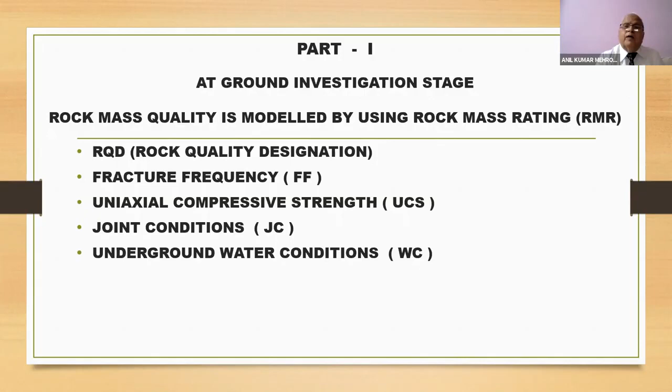As you all know, geotechnical engineering by its nature demands tools for coping with large uncertainties and variations in material properties. Identifying conditions prevailing in rock mass and soil, and if satisfied, could convert geostatistics into a real design aid for geotechnical engineers. Geostatistics deals with regionalized variables. Regionalized variables are those which have a spatial correlation with distance. The sample values are correlated with distance. This is a very important aspect, and the only difference between conventional statistics and geostatistics.

Rock mass characteristics are also spatially correlated. Now, this is very important. Rock mass characteristics are spatially correlated, and hence they are also regionalized variables. So they cover the first condition of applying geostatistics. They have some relationship between location and data.

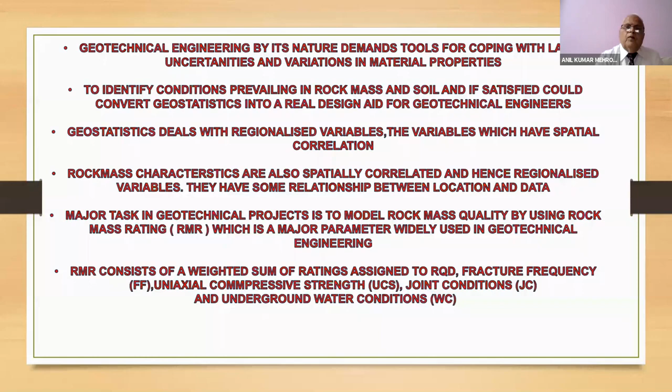A major task in a geotechnical project is to model rock mass quality using rock mass rating, RMR, a major parameter widely used in geotechnical engineering. RMR consists of a weighted sum of ratings assigned to RQD, fracture frequency, uniaxial compressive strength, joint conditions, and underground water conditions. Rock mass properties are summarized using rock mass classification. The most commonly used scheme is rock mass rating.

Intact rock is defined as the rock material found between discontinuities. The rock mass comprises the total volume of the rock, including intact rock and discontinuities, and its mechanical behavior can be significantly different. So intact rock properties are density, permeability, and rheological behavior. Rheology is the study of the flow of soft solids. Then fourth is UCS, uniaxial compressive strength.

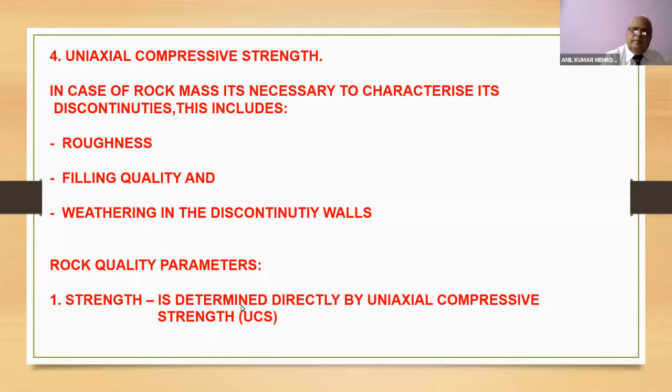In case of rock mass, it's necessary to characterize its discontinuities. This includes roughness, filling quality, and weathering in the discontinuity walls. Now, rock quality parameters. First, strength is determined directly by uniaxial compressive strength, UCS. Number two is number of joints per cubic meter, JV, and RQD. Presently it is empirically calculated: RQD = 115 - 3.3 JV. This is after Palmström 1982.

Third is roughness. It is a potentially important component of its shear strength, after Barton and Choubey 1977. Aperture. It is the perpendicular distance separating the adjacent rock walls of an open discontinuity. The intervening space may be open or filled with clay. This parameter also accounts for the condition of joints or discontinuities.

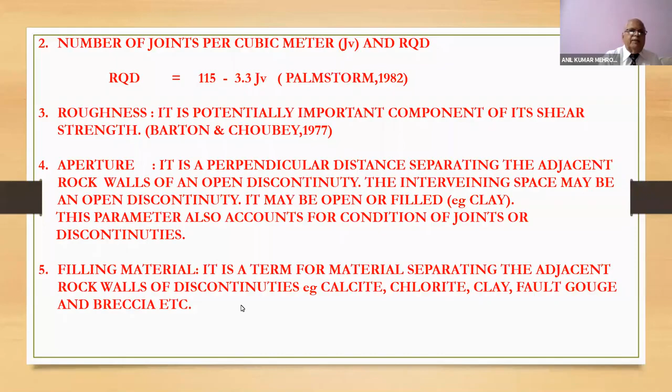Filling material. It is a term for material separating the adjacent rock walls of discontinuities, for example calcite, chlorite, clay, fault gouge, and breccia, etc. Now, the sixth is the spacing. It is recorded as the perpendicular distance between its representative members. If great variation is observed, the average of spacing indicated by various members of a joint set may be taken. The most common classification of joint spacing is presented by Deere 1964-68.

Orientation. Orientation of a discontinuity in space is described by the dip direction and amount of dip, that is, if one understands the dip and strike. So if the direction is 315 degrees and the amount is 30 degrees, this is represented by 315/30. These are presently calculated by stereographic techniques and computer programs, after Huang and Charlesworth, 1989.

Groundwater flow. It has an adverse effect on the shear strength of joints. It can be classified as completely dry when there is no inflow, moist when less than 25 liters per minute per 10 meters of length, and moderate pressure at 25 to 125. Severe problems come when it is more than 125 liters per minute per 10 meters of length of tunnel.

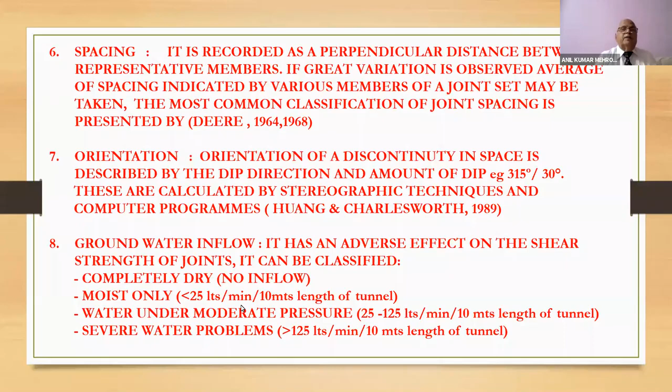Persistence. It is the spatial extent or size of a discontinuity within a plane. It is roughly quantified by observing the discontinuity trace length on the face of the outcrop. It is classified as very low persistence, less than 1 meter; low persistence, 1 to 3 meters; medium persistence, 3 to 10 meters; high persistence, 10 to 20 meters; and very high persistence, more than 20 meters.

Number of sets of joints. Mechanical behavior of the rock mass is mainly controlled by various sets of discontinuities, their geometry and spatial distribution. The number of sets is mainly determined by contouring poles of discontinuities. It is classified as follows: massive, occasional random joints, one joint set plus random, two joint sets plus random, similarly up to four or more joint sets, and crushed rock. This classification was done by Zhang and Tong, 1988.

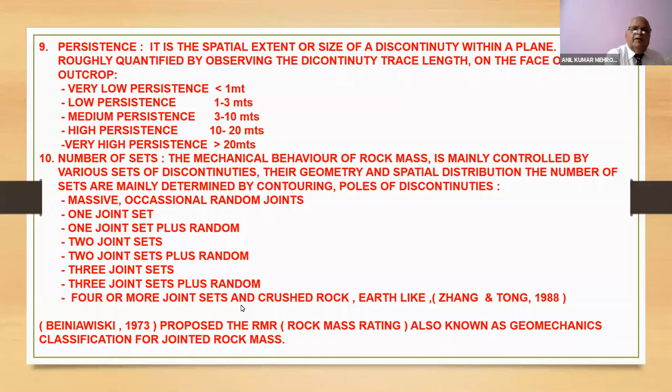Then Bieniawski classified the RMR, also known as the geomechanics classification of the rock mass, in 1973. Then in 1976 and 1979 he modified it and gave 5 basic parameters considered for geomechanics classification instead of all these 10: RQD, the strength of rock, spacing of joints or discontinuities, condition of joints, and groundwater conditions. So the RMR system largely depends on various joint discontinuity parameters. This is after Choubey and Dhawan, that is Dr. Gopal Dhawan of Dhawan's Academy, 1990.

A rating is allocated to each parameter, and the overall rating for the rock mass is arrived at by adding the ratings for all the parameters. RMR cannot be estimated directly as a variable; it is the addition of all 5 parameters. All 5 parameters have to be estimated separately, separate ratings obtained, and then added together to give a final RMR.

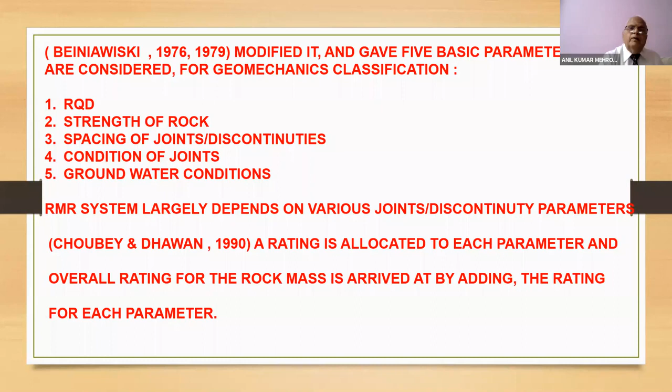Now, I come to part 2 of my presentation. This is a case study of geostatistical evaluation of a mineral deposit. I have included this just to give you an idea how geostatistics is applied in evaluation of a mineral deposit, so the same analogy can be applied for a geotechnical project also. I will be covering this by answering these 3 questions: What is geostatistics? When to apply geostatistics? And how to apply geostatistics?

So the first question is, what is geostatistics? The study of variability of regionalized variables is called geostatistics. It is the basic definition. In the early 50s, Professor D.G. Krige, a mining engineer working in a gold mine in South Africa, noticed discrepancies between the estimated grades of blocks and the true grade after mining. Professor Matheron of the Center of Geostatistics, Fontainebleau, France, thought that the underlying problem was the correlation existing between the sample values. This correlation had to be quantified as a mathematical function of distance between the samples.

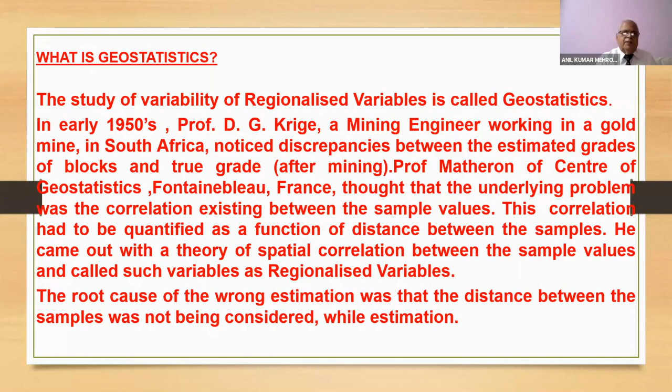So the difference between conventional statistics and geostatistics is that in conventional statistics, one deals with random samples irrespective of location of the sample, while in geostatistics, spatial variability is studied and we try to capitalize on this knowledge. An estimator called kriging, named after Professor Krige, was developed for estimation of ore reserves and grade. Kriging is also termed BLUE, Best Linear Unbiased Estimator. By this method, estimation error can be quantified, thus giving the prediction accuracy, which is so important for taking an investment decision before opening of a mine after exploration.

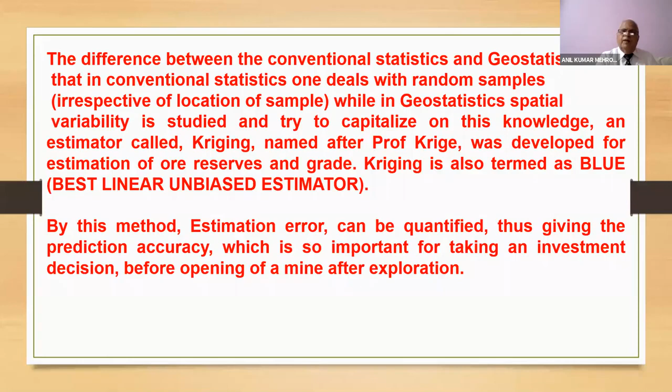When to apply geostatistics? The second question. Geostatistics is an interdependent scientific discipline rather than a standalone technique. It has become a tool available to geologists and mining engineers, and now I'll add geotechnical engineers also, for the purpose of characterizing a mineral deposit or a geotechnical project. A geostatistical study properly carried out is generally expensive and time consuming, not cheap and fast because of use of a computer. Once it is decided to carry out a geostatistical study, objectives and assumptions should be very clearly spelled out.

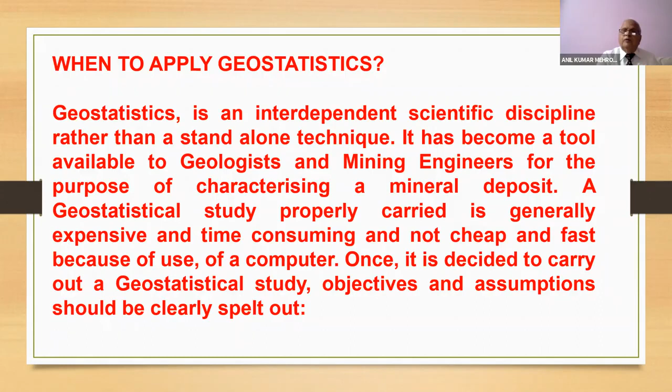Now, what are the objectives? We have to clearly spell out what kind of reserves are to be estimated. First is in situ geological reserves. Second is recoverable mining reserves. What is the end use of estimated reserves: ore reserve reporting, feasibility study, or production planning? Which are the relevant geological characteristics of the deposit? Now, here come all the geological details. Geological characteristics may vary from deposit to deposit, whether homogeneous, bedded type, vein type, or disseminated type, strike, dip, folds, faults, foliation, and joints, etc. Almost all these things are also covered in the geotechnical study.

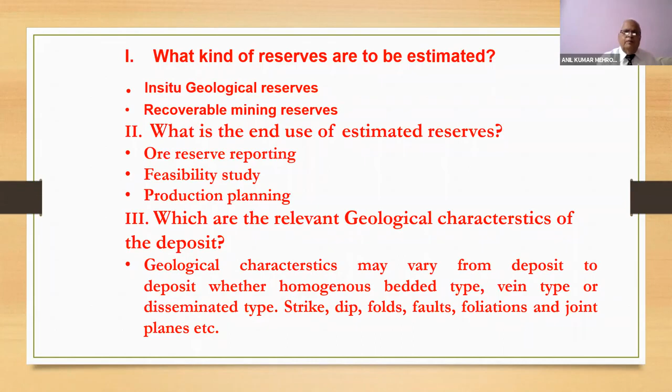So the data considered should be clearly spelled out: primary assay data, computed zone-wise data along with associated thickness. Here I am emphasizing computed zone-wise data because of the volume variance relationship, which I'll explain later on. What are the geologist's views on continuation of mineralization? Here I am emphasizing that the geostatistician doesn't work in isolation. He has to work in coordination with the field geologist, and finally, once the thing goes to the mining side, the mining engineer is also involved.

So the geologist's interpretation on the basis of exploration data, with the help of geological sections, LV sections and level plans, on continuation of mineralization in depth or along strike. These plans are prepared by the field geologist, and his views are taken by the geostatistician: what are his views regarding the continuation of the ore zone, ore body, along the strike or along the dip. In case of mineable reserves, what type of mining is envisaged, what cutoff grade is to be considered. With change in cutoff grade, the shape of the ore deposit changes, and on the shape of the ore body, the type of mining envisaged and mining equipment used will depend.

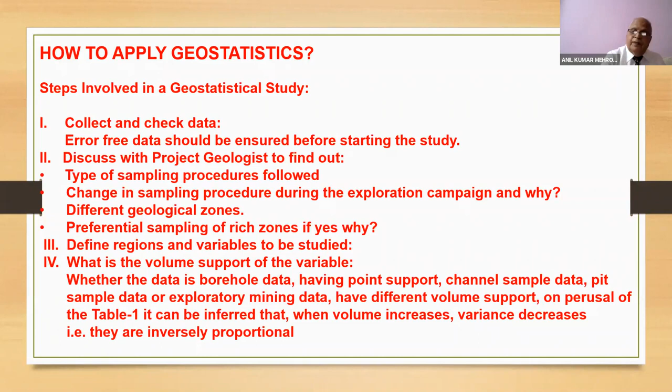Now I'm just showing the difference by change of support, volume support. This is just an example of P2O5, that is a phosphorite deposit. Initially we had 2,632 samples. They were of different lengths, some less than 1 meter, some more than 1 meter. So we regularized them to 1 meter, and instead of 2,632, the number of samples increased to 3,143.

Now consider the variance. The initial 2,632 samples have a minimum value of 0, maximum value of 34.1, mean of 6.98, and variance of 51.56. Once regularized to 1 meter, all the samples are of the same volume, so variance decreases. It goes to 43.87.

Now we regularize on the basis of the bench height. If regularized to a 6 meter bench height, the number of samples comes to only 565, and variance decreases from 51.56 to 35.03 with 6 meter length and 1 meter from the bottom. With 6 meters height and 2 meters from the bottom, it further reduces to 34.73. So finally, we take 6 meters bench height and 2 meters at the bottom. The minimum variance is 34.73.

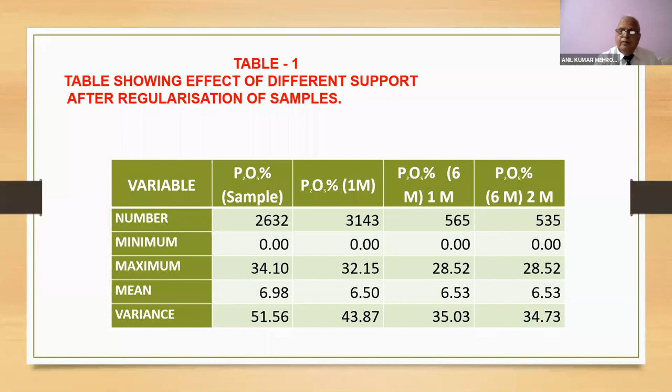So I think everybody understands what variance and standard deviation are. If somebody has a question, please ask.

Then basic statistical tests are to be carried out to understand the behavior of the variable: mean, variance, standard deviation, scatter plot, frequency distribution, and histograms. These are called the standard tests to be carried out before starting. They give an idea of the behavior of the variable. The histogram clearly shows it's a right-skewed histogram.

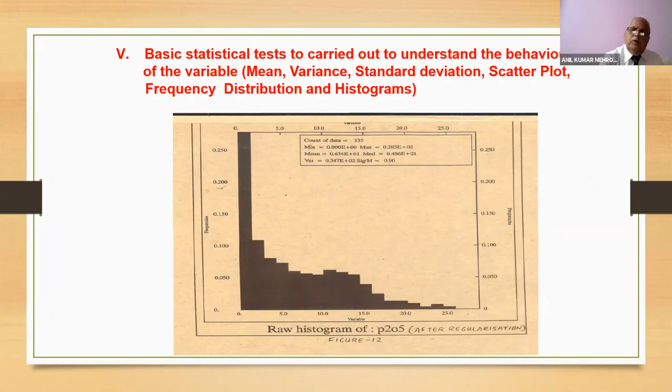Another condition for a geostatistical study is that second order stationarity must be fulfilled, that is, mean and variance. These are 2 orders of stationarity: first is mean, second is variance. The mean and variance of the variable should be constant up to a certain distance. Why distance? I'll tell you shortly.

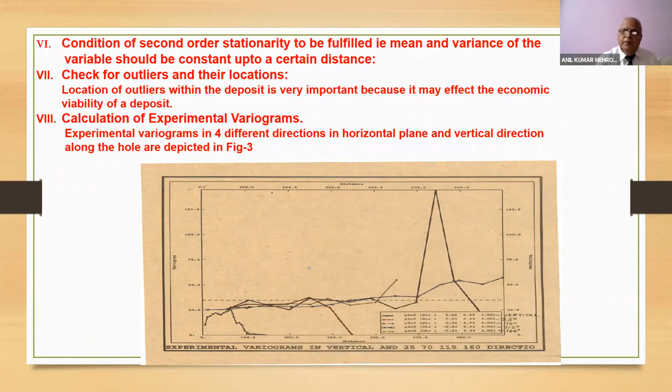Now, the last step is the fitting of the variogram model. There are different types; I am not going into details of the different variogram models, that is a very vast chapter. This particular line is the fitted variogram model in 3 directions: the vertical, and 2 directions in the horizontal plane.

The variogram gives 3 parameters. Nugget effect: the nugget effect is the distance on the y-axis from where the variogram starts. It is not starting from 0, it is starting from somewhere here. So this part, from 0 to here, is called the nugget effect.

The sill is the highest point on the y-axis at which it becomes flat. So this is the nugget effect, and this is the sill. Sill plus nugget effect is the total sill.

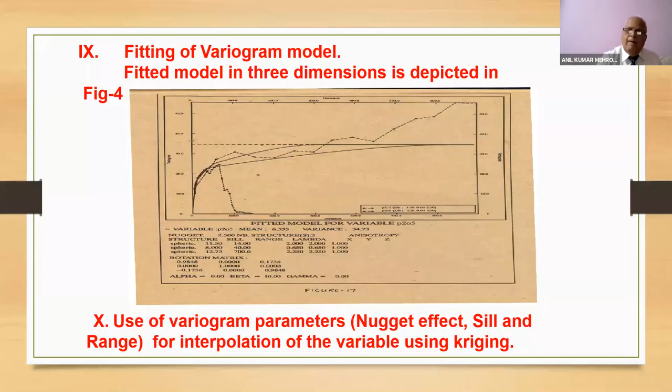C, that is C0 plus C. And this distance on the x-axis where it becomes flat is called the range of the variogram. So the range is very, very important. This is why I said second order stationarity should be fulfilled up to a certain distance. That is the distance of range of the variable.

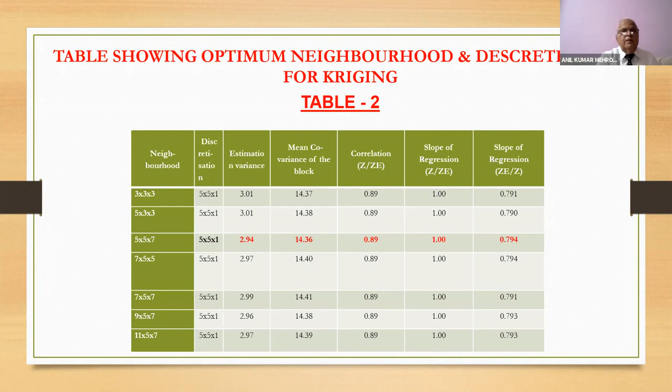Now I come to the estimation stage. Now you see, in this particular case study, I have tried to do Kriging under different permutations and combinations. This neighborhood column speaks about 3 by 3 by 3, means 3 blocks in x-axis, 3 blocks in y-axis, and 3 blocks in z-axis. 5 by 3 by 3 speaks 5 in x-axis, 3 in y-axis. Similarly, 5 by 5 by 7, 7 by 5 by 5, 7 by 5 by 7, likewise.

I have done exercises almost 7, 8 times to get the minimum estimation variance. The neighborhood area is the area which will be considered for estimation along the x-axis, the number of samples coming in this area. That is called the neighborhood area. So the number of samples which will be considered for estimation in this particular area.

So I have highlighted the 5 by 5 by 7; estimation variance is 2.94, which is the minimum of all of them. So I consider that this is the best estimation, the best possible combination of neighborhood. So this gives you a minimum variance of 2.94 and the slope of regression, etc. The computer program gives the entire thing.

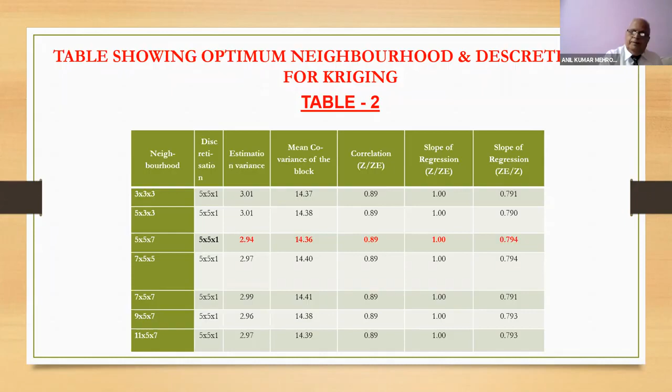This gives a very clear picture of estimation accuracy, prediction accuracy. Very clear picture. And wherever there is a higher Kriged variance, it should be retried by adding more samples to increase your prediction accuracy.

So finally I come to this: misuse of this technique can lead to disappointment, if not damaging results. So be cautious about it. The technique should not be misused. Whatever conditions I have told, when to apply and how to apply, those conditions have to be properly followed, and then the technique should be utilized. Otherwise, you will end up with damaging results or disappointment.

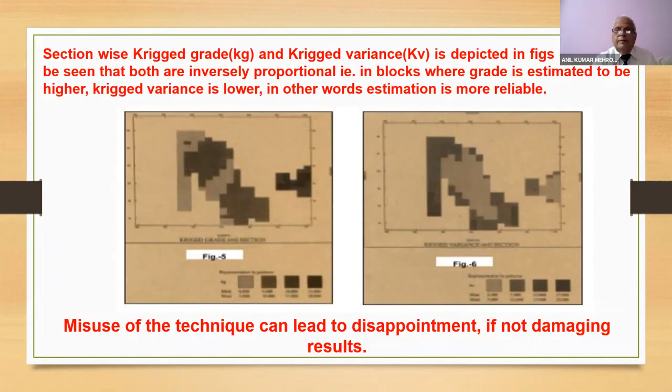Now, I come to part 3, application of geostatistics for estimation of rock mass rating, RMR parameters. This technique can only be applied under certain conditions. There should be a spatial correlation between sample values, that is, they are regionalized variables. All the samples should have the same volume support, because the volume variance relationship is very important. Then the condition of second order stationarity should be satisfied. Mean and variance should be constant for a certain distance.

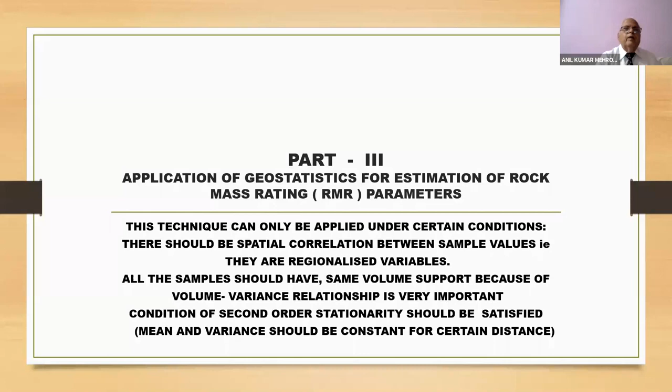So, application of geostatistics for estimating RMR parameters in geotechnical engineering. Geostatistics originated to solve problems of estimation using kriging, also known as the best linear unbiased estimator. It imposes minimization of estimation variance or estimation error. Geostatistics mainly uses various kriging methods for estimation of regionalized variables on the basis of structural analysis, to evaluate and solve practical problems of estimation.

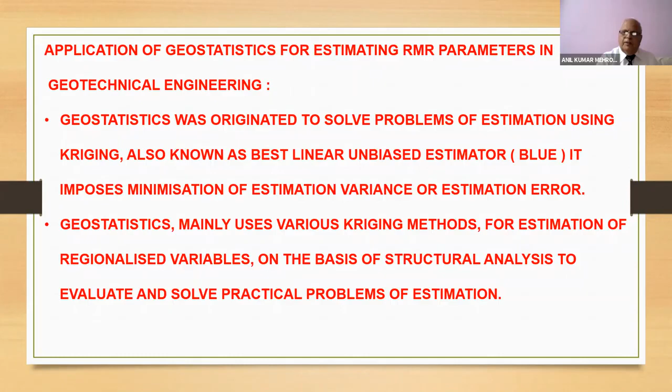It also has many other important tools such as conditional simulation and indicator kriging. Correlation coefficient, standard deviation, that is the square root of variance, and mean are used to describe the degree of correlation between variables. The main job in utilizing the geostatistical technique is to model RMR, rock mass rating, for any geotechnical project.

Block kriging is used to estimate average values of an indicator of rock hardness. If you put one indicator for rock hardness, then it can be used as an indicator, and to characterize the distribution of fracture joints. That means your rock hardness, fracture joints, to understand the spatial distribution at different scales. For these parameters, block kriging can be used. Ordinary kriging is utilized to estimate RQD distribution, associating the estimation of standard error as a measure of reliability.

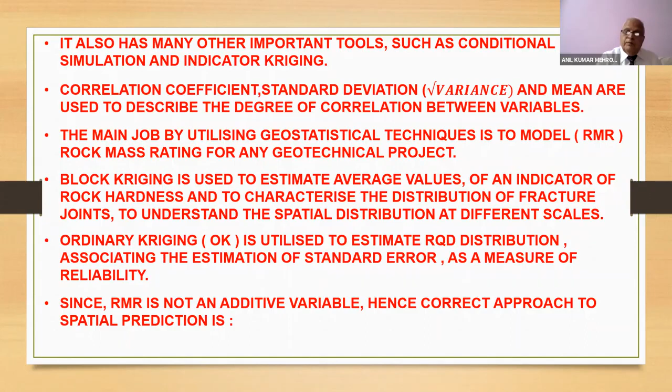Since RMR is not an additive variable, the correct approach of estimating RMR is to estimate or simulate each of the parameters of RMR, RQD, FF, UCS, JC, and WC, which are regionalized variables, to assign a rating to the estimated or simulated value of each parameter. To obtain the final rating of RMR, the sum of all the ratings is obtained.

When the variable has a log normal distribution, the logarithmic kriging method can be used. Random kriging can be used when the data is less and the prediction accuracy is not required to be high. There can be stages. Actually, in the first stage, if you don't want your prediction accuracy to be higher, then random kriging initially can be used. Then indicator kriging can also be utilized.

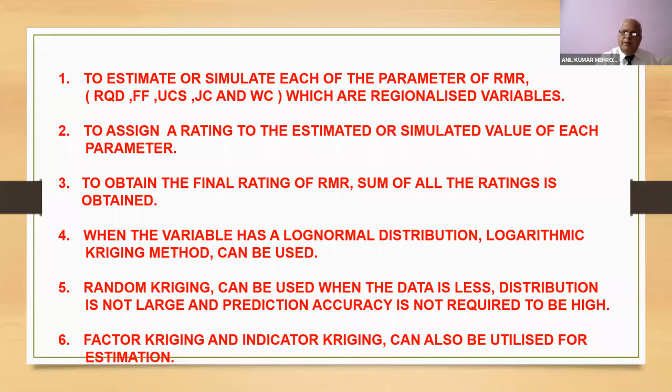So these are the different geostatistical techniques which can be used for estimation of different geotechnical parameters. Now I come to the prime reasons for geostatistics not being utilized for design of a geotechnical project. These include widespread unfamiliarity with the concepts of geostatistics. This is the basic thing. Widespread unfamiliarity is there with the concept of geostatistics, particularly in our country. Even in the mining industry, it is not being applied everywhere.

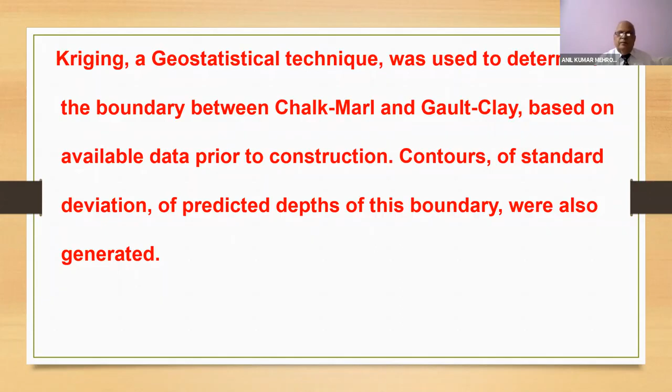Now, contours of standard deviation of predicted depth means what? The standard deviation is the square root of variance. So you can say that contours of variance of the predicted depths of this boundary were also generated. Either you talk of standard deviation or the square of standard deviation, that is variance. The square root of variance is standard deviation.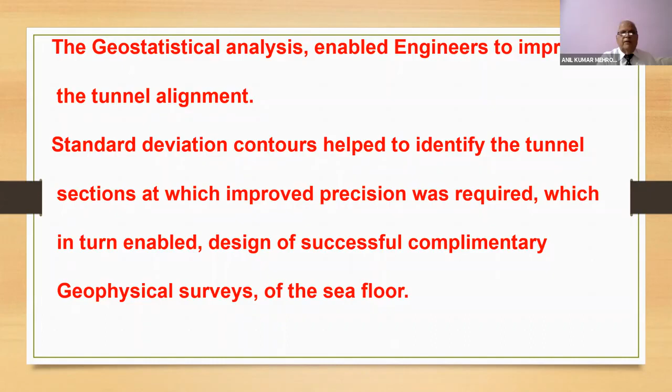Geostatistical analysis enabled engineers to improve the tunnel alignment. The standard deviation contours helped to identify the tunnel sections at which improved precision was required, which in turn enabled design of successful complementary geophysical surveys of the seafloor. As data became available from these surveys and ongoing construction, tunnel engineers used geostatistics to repeatedly improve the spatial model of the chalk marl gault clay interface. The result was that the channel engineers were able to keep the risk of penetrating the gault clay at acceptable levels and achieve their objective of avoiding the gault clay formation.

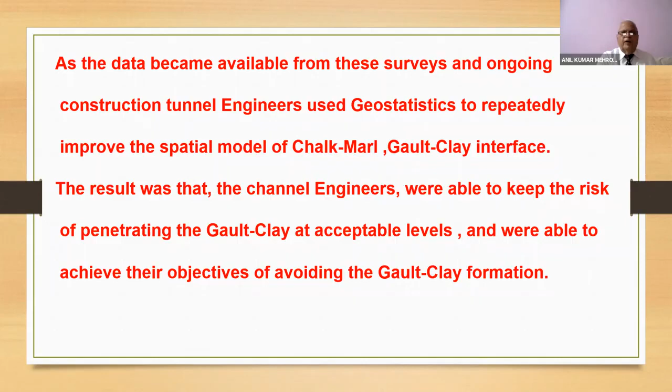Now, finally, I come to the conclusions. Geotechnical behavior may significantly impact the cost and performance of projects in hydropower and tunnels. Prediction of geotechnical variables is one of the most relevant requirements of such projects. It should be utilized not just during the ground investigation, but also in data processing and interpretation. It should be a continuous process, a dynamic process.

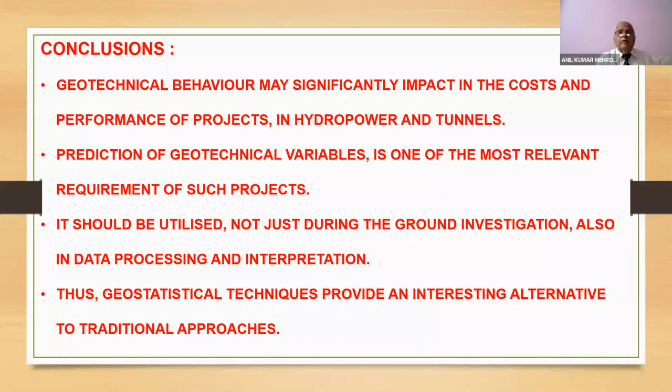Thus, geostatistical techniques provide an interesting alternative for estimation of geotechnical parameters. They give a more precise estimation with minimum estimation variance by taking into account the spatial correlation between sample values of the variables. Besides, the estimation technology provides prediction accuracy. This can be used for risk analysis and for the design of the project site.

My opinion is that geotechnical engineers and engineering geologists should be encouraged to explore geostatistical techniques as a possible alternative to the techniques that are in use today. It should be tried in a phased manner on an experimental basis to make a beginning. This will give a quantum leap in developing confidence in designing.